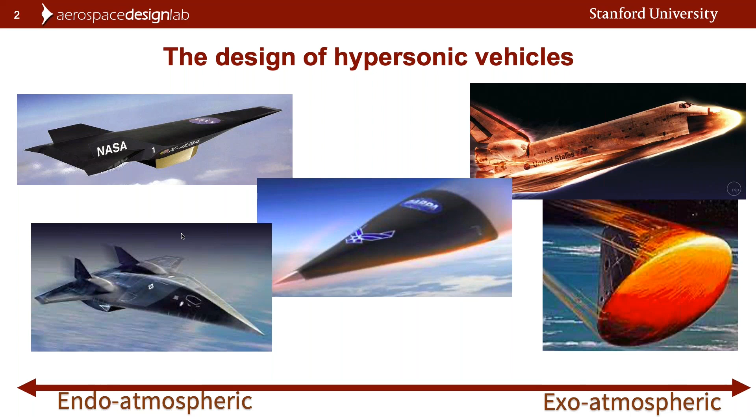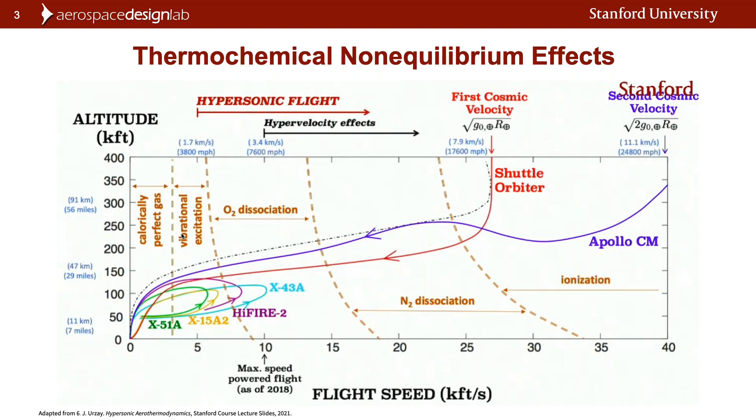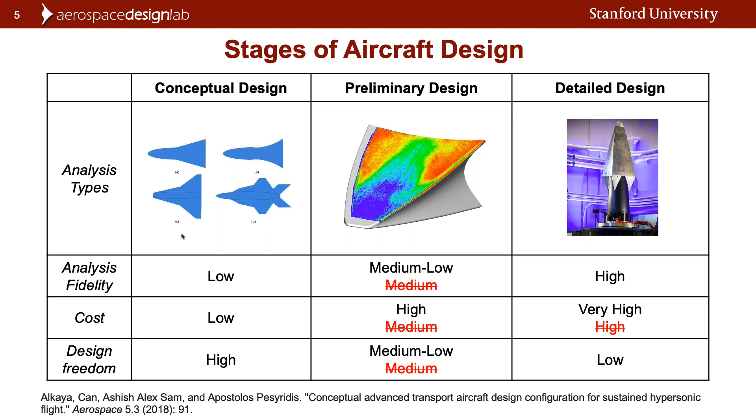So the development of SU2 NEMO, which was a framework that's been designed for hypersonic flow analysis, and now for hypersonic vehicle design, coupling with the discrete adjoint. So quickly, I'm going to go through some of the physical phenomena that we expect to see in hypersonic flow in a little bit more detail, and then get into some results.

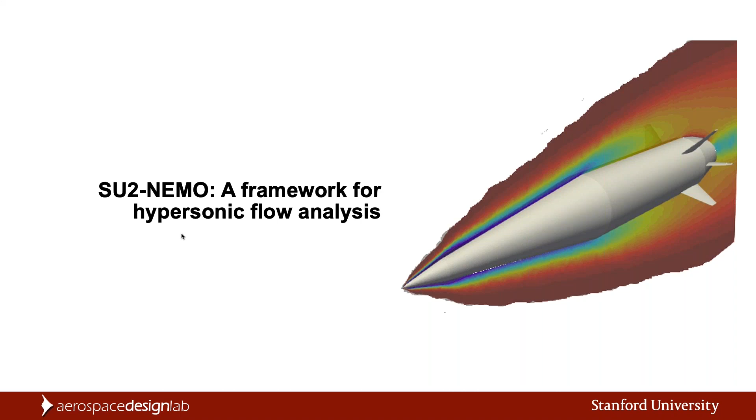So SU2 NEMO, or the non-equilibrium models, I know you've probably heard a bunch about this now, is a robust and accurate simulation tool for hypersonic flow problems. It includes everything that you would expect to see in a hypersonic flow problem. So the thermochemical non-equilibrium, and recently turbulence models, which unfortunately I had to pick and choose which talk to give. The coupling with standard turbulence models, including the SA and SST models, which are implemented in a new branch.

SU2 NEMO also has a flexible code architecture to allow us to quickly plug and play with different hypersonic flow models, gas models, including Mutation++, and a suite of boundary conditions that Jacob had just mentioned a couple talks ago.

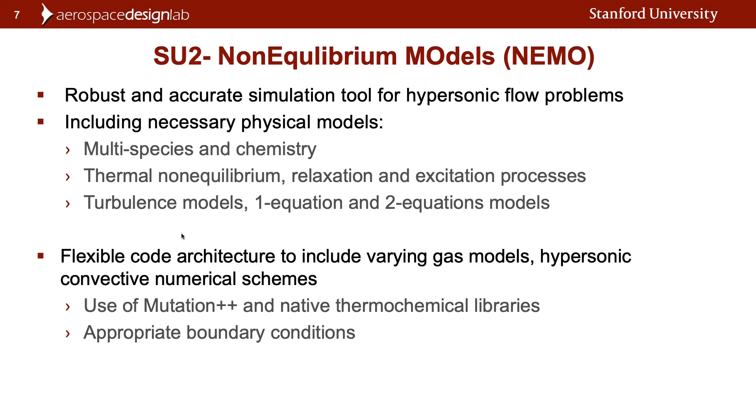I might have double clicked that.

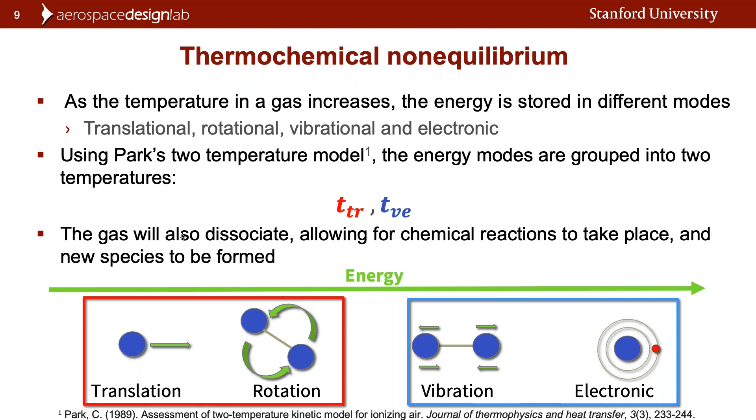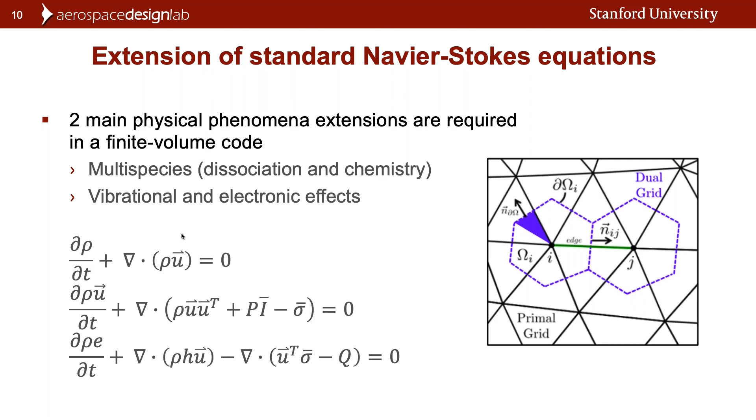So the standard Navier-Stokes equations are presented here. To account for all of these extensions to the Navier-Stokes equations, we go from these three equations, or rather 5 equations if we take a three-dimensional problem, to something that looks more like this. So instead of one single continuity equation, we have a continuity equation for each individual species. So generally, we're looking at 5 additional equations just here, or rather 4.

And we also have an additional vibrational-electronic energy equation down below to track that extra energy contribution in the flow. So already we're extending our typical RANS 3D equations from 5 to 9, 10, if you want to get crazy, 30. So very clearly, we're getting much more computationally inefficient.

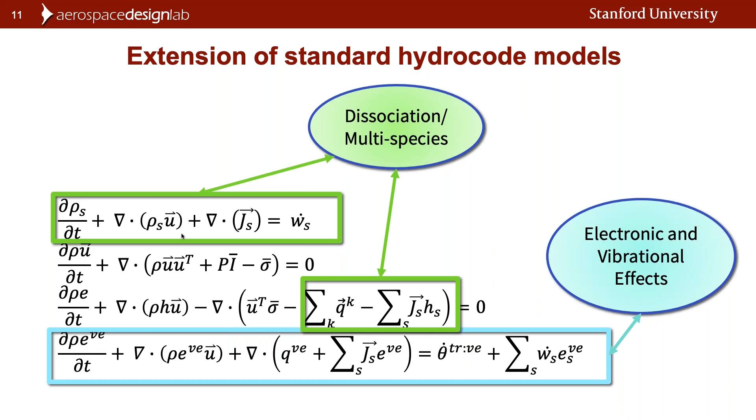So with that out of the way, I'll briefly touch on some of the past work done with the adjoint in hypersonic flow, particularly within SU2. So this work is built upon Sean Copeland's work, where he derived the continuous adjoint for hypersonic flows. This continuous adjoint required derivation of the governing equations for every single physical phenomenon. This made it prone to some derivation error, implementation error, as well as it was inflexible. So we weren't able to go and simply add the catalytic wall boundaries and then be ready to go.

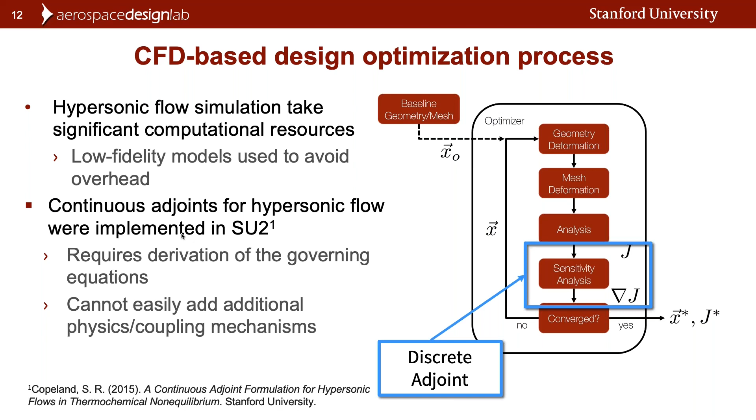We had to rederive that, and we also had to make sure that we were properly capturing the coupling that occurs between those boundary conditions and the numerical schemes. So that's all avoided with the coupling to the discrete adjoint. So now it's very much a black box kind of functionality where we can track those variables through the entire process without having to rederive anything.

So with that, I'm going to briefly go over some of the results of the discrete adjoint as a verification effort. So in these cases, what we're going to be doing is comparing the discrete adjoint to a finite difference formulation to compare the design sensitivities. So this first case is an HTV2-like boost glide vehicle. So essentially this is a long endurance, high speed vehicle, not powered, but it goes through long endurance

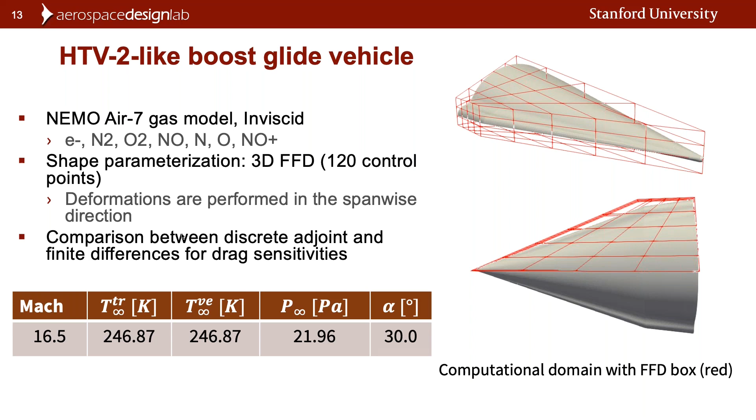flight. So with this, we were using the NEMO Air 7 gas model. So we include a weakly ionized flow. And to parameterize it, we used the FFD boxes. There's 120 FFD boxes. And it was a Mach 17 case at an angle of attack of 30 degrees.

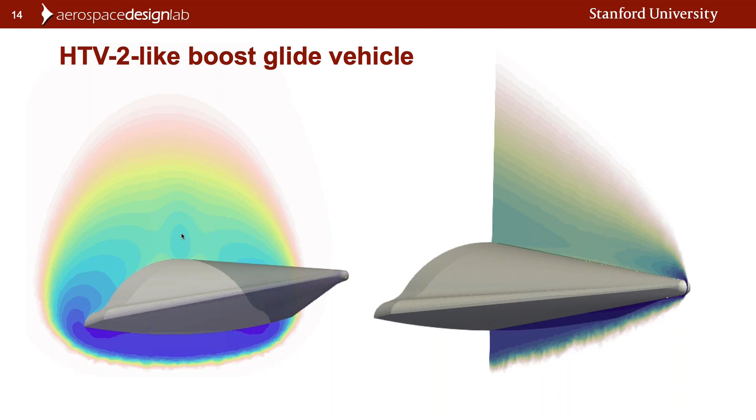So here's just a couple of little pictures of eye candy of Mach contours. We can see nice pretty shock waves below the surface and a little bit of recirculation coming around the aft end of the vehicle.

Next, we have a Mach 8 viscous cylinder. So this is using a 5-species gas model with the Wilke-Blottner-Eucken transport model. This is also run with the SA turbulence model. So it's kind of running the full gamut here. And instead of looking at coefficient of drag, we'll be looking at the total heat flux along the body, as heat flux is arguably the most important thing to look at in hypersonic vehicle design.

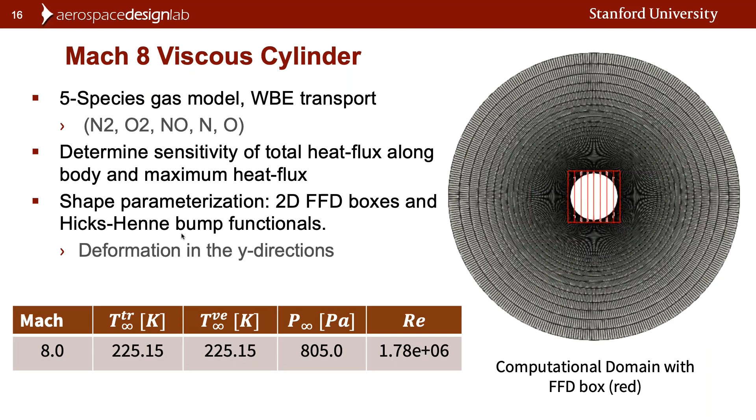So here again on the left is our comparison of the total heat flux we see on the wall. Again, we see a very good agreement once we get to a smaller step size. The finite difference with a step size of about 1 millimeter, we see a pretty significant difference with respect to the discrete adjoint. However, creating a smaller step size, we see a much better agreement.

And at the top right, we see the adjoint density. So this is where the flow solution is most affected, or the heat flux is most affected, and we expect to see everything ahead of the cylinder, because we're in hypersonic flow, so all the flow characteristics are coming from right to left. And lastly, at the bottom right, we see the surface sensitivity magnitude. So where the heat flux is most sensitive to surface perturbations.

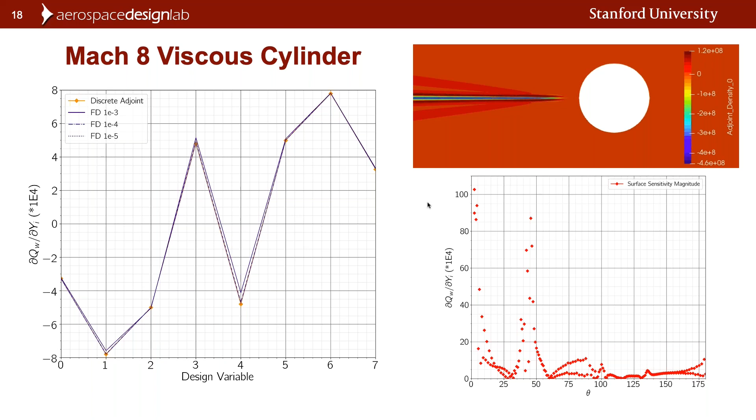With that, some conclusions. The SU2 NEMO code suite has been successfully coupled to the discrete adjoint for 2D and 3D problems with various objective functions. Further testing is ongoing for coupling to the turbulence models, particularly some of the two-equation SST models. Some future work includes coupling the Mutation++ library to the CoDiPack and MeDiPack suites. Right now, it's incompatible. And lastly, I'm in the process of making an SU2 NEMO tutorial, which has been put off for way too long.

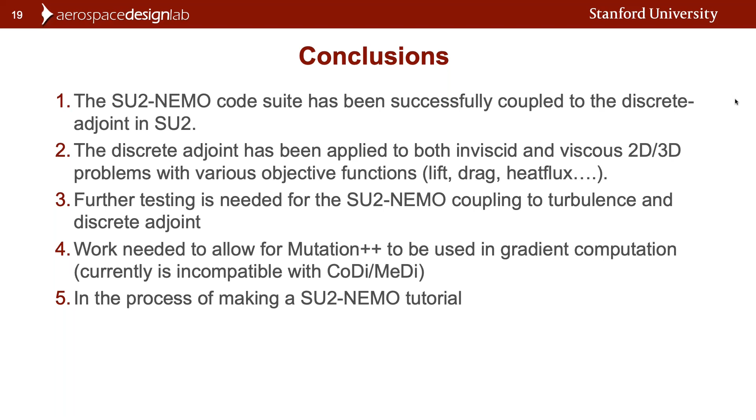Regarding the iterations, it depends on the type of problem. With an Euler or NEMO Euler case, they converge fairly quickly. I believe I could get convergence within 5,000 to 10,000 iterations for the HTV2 case. So for this case, it took about 5,000 to 10,000 iterations, whereas the cylinder took maybe around 40,000 iterations from memory.

When it comes to viscous problems, with the stiff chemistry equations, it takes a while to resolve the boundary layer. And work is being done to speed that up using the implicit Jacobian. The Jacobians are there. There are some tricks that I think we need to play in the solver development to make sure that we have proper stability with those before it's something that we can run with very high CFLs.

Great, thank you, Wally. There is another question from people remotely connected: is the SU2 NEMO library included in the latest version of SU2, or is it still closed to the public? Maybe I can answer this question. So the SU2 NEMO solver is openly available and included in the latest release. You can find it in the master branch and the develop branch. If you cannot find it, please give us a shout and we will be able to guide you.